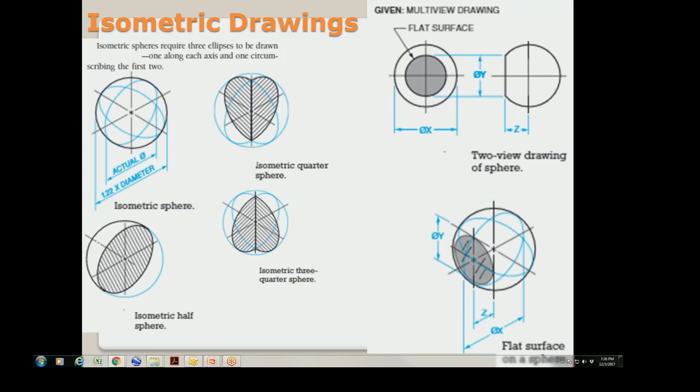Welcome back, everybody. Let's go to the isometric sphere.

To draw an isometric sphere, we require 3 ellipses to be drawn, one along each axis and one circumscribing the first two. So if you look at the isometric sphere, you can see 3 ellipses: here is one, and here is the other one, and this is the actual diameter, but then the entire circle is 1.22 times this diameter of the circle.

So this is an isometric half sphere. Half the sphere only shows half of it. As you can see, this is just half. A sphere is more like a basketball. Imagine this is your basketball. You only see half the basketball.

And this is the isometric quarter sphere, and you can see it's only 1/4 of the sphere. And the 3/4 is about 0.75 of the sphere. It's gonna look like a heart.

So for a flat surface on a sphere, the way to show that on the isometric drawing is to find out what the diameter of the circle is and the diameter of the flat area, and then use the same idea that we learned in the past, and either use a template to draw this ellipse onto the sphere, or use the construction method, which is like using the compass. But I would suggest you use the ellipse template.

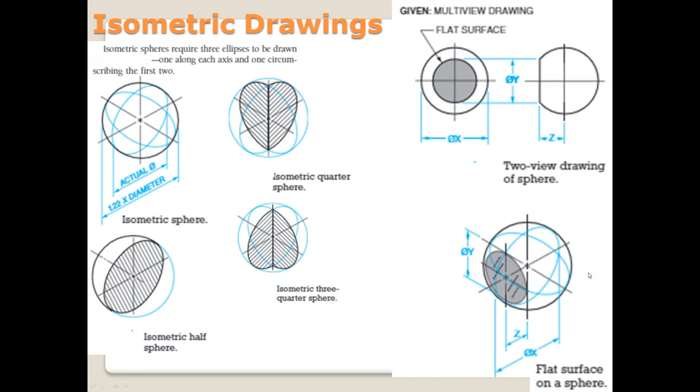And I want to go a little bit quicker, because I want to finish up this chapter 18 today.

So to look at the axonometric drawing and projection: axonometric means using or designating an orthographic projection of an object, such as a building, on a plane inclined to each of the 3 principal axes of the object, 3-dimensional but without perspective. In the projection, the dimensions along the 3 principal edges are foreshortened.

Exploded drawings show all the components of an assembly as individual isometric drawings. Assembled drawings show how a single product looks when assembled. I'm going to show you another picture of how the exploded drawing looks.

And if you look at this, isometric projection causes dimensions along the 3 principal edges to be foreshortened to approximately 82% of the true length. Note that the diagonal of the 1-inch cube is seen as a point in the A view. The 3 edges 3-2, 3-4, 3-7 equal 0.816.

So in other words, if you look at this picture here, you have a 1-inch cube here. It is a 1-inch cube, but in your finished product, it is only going to show 0.816 inches. This is only 0.816 inches, but the diagonal of the square is equal to 1 inch.

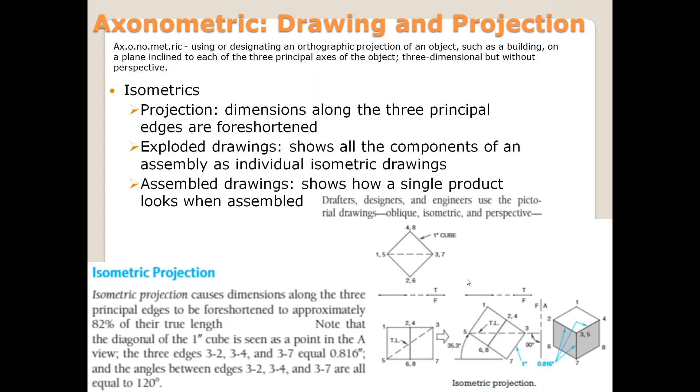So here is one of the good examples of the exploded drawing, showing all the components of an assembly. If you put everything together, you show that product as assembled. But this is exploded because, as you can see, all the components are separated. That's like you exploded the product.

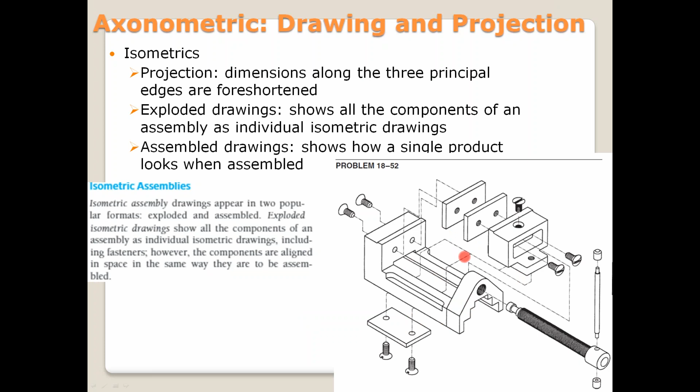So isometric assembly drawings appear in 2 popular formats, either exploded or assembled. Exploded isometric drawings show all the components of an assembly as individual isometric drawings, including fasteners. However, the components are aligned in space in the same way they are to be assembled. So this is assembled and this is exploded.

And let's summarize with types of projection. There are two main types of projection: we have perspective projection and parallel projection. And under perspective projection, we have linear perspective.

We have aerial perspective. Under linear perspective, we have 1-point perspective, 2-point perspective, and 3-point perspective, as you can see in the picture. In 1-point you only look from one vantage point, whereas in 2-point perspective you have 2, or 3. Aerial is like an aerial photo showing the actual 3 dimensions of the object.

And under the parallel projection, we have an oblique projection and we have orthographic projection. The oblique projection, we have a cabinet projection or cavalier projection. We're going to talk about these two projections in the next video. But for the orthographic projection, we have isometric projection, and we have a dimetric projection, and we have a trimetric projection. We're going to talk a little bit more about this isometric, dimetric, and trimetric projection in the next

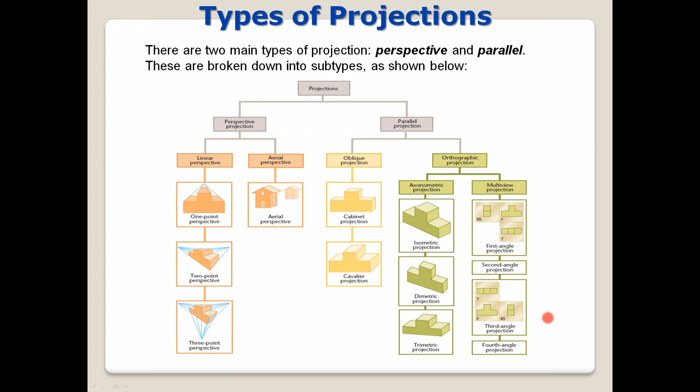few slides. And here for the multi-view projection, we have a front view, top view, and the right side view. First, the first angle projection, and we have a second angle projection. We have a third angle projection, and we even have the fourth angle projection. So it depends which angle projection you want to move forward. For the first angle projection, you start with right side to your front view to the top, whereas the third angle projection, you're from your right side going to the front, going to the top.

So let's talk a little bit more about axonometric drawing and projection. From here we have axonometric projection. We have dimetric and trimetric. So what is a dimetric drawing and what is a trimetric drawing? As you can see from this summary here, in the dimetric drawing, only 2 of the angles are equal. As you can see, of all these angles, you only can find 2 angles are equal, 130 degrees, 130 degrees, and then same thing here, you only have 2 angles equal, and there is less distortion of receding lines.

So for the trimetric drawing, the axes are rotated so that each angle is different and the scales are also different. So if you look at the trimetric drawing here, you see that this type is more realistic, but it's time consuming. None of these angles are the same; these are all different angles. Unlike the dimetric, where we have at least 2 angles the same. For the trimetric, none of these angles are the same, and also the receding lines have 2 other scales and 1 full scale.

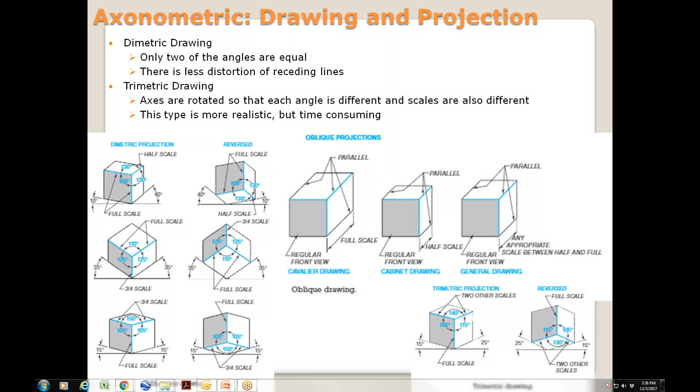So now let's go into what is a cavalier and also the cabinet drawing. In cavalier drawing, the receding lines are at 30 degrees or 60 degrees and drawn full size. Cabinet drawing is the same as the cavalier, but receding lines are only half the size. General oblique drawing is similar to the cabinet drawing, except the drafter may choose any scale they want. So if you look at this, the cabinet drawing has the same range of receding axis as cavalier drawing, but the receding distances are drawn to half size.

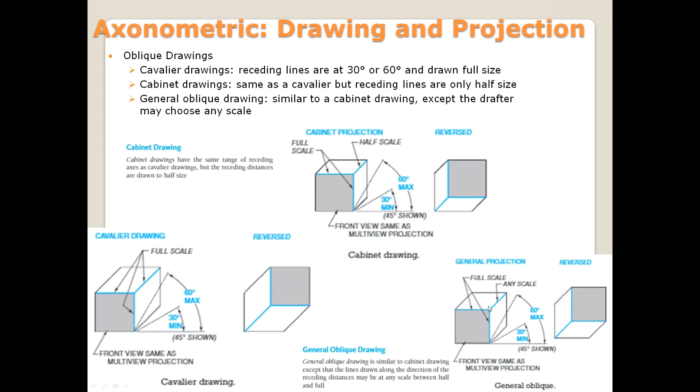But then if you look at the cavalier drawing, all these receding lines are in full scale. And compared to the cabinet drawing, this is all in half scale. And the general oblique drawing is similar to cabinet drawing, except that the lines drawn along the direction of the receding distances may be at any scale between half and full. So this here is full scale, this is any scale they want. This has to be full, and then this receding line can be any scale.

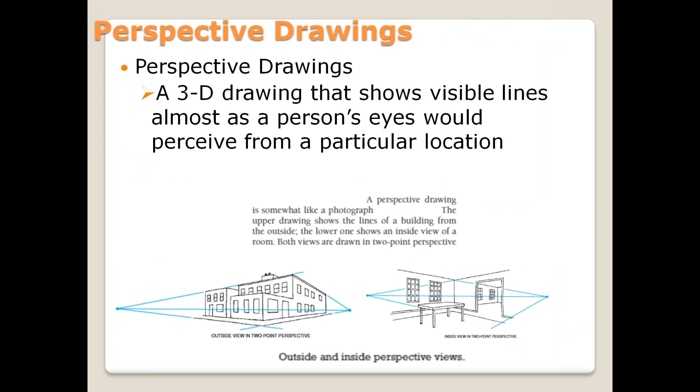Okay, for the perspective drawing, I'm going to end the video here, and we're going to continue on to video number 4.